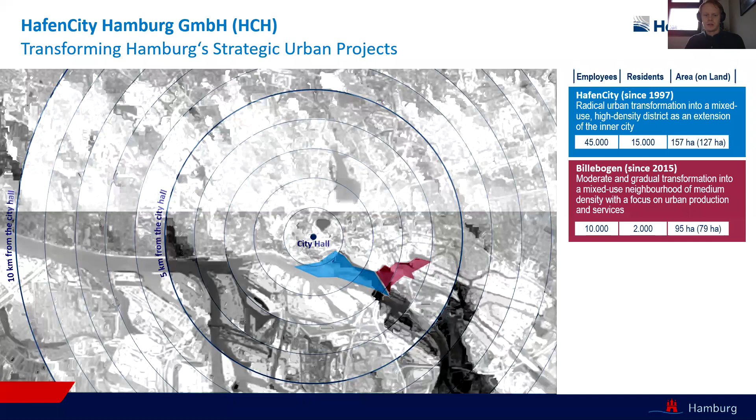Then another area, Billebogen, which is also quite centrally located, but in comparison to HafenCity, it's not a port transformation, it's a regeneration project of an existing commercial light industrial area in Hamburg's east area.

The third project that we manage is Grasbrook. It's, so to say, the southern extension of HafenCity. It's also built on former port land, and it builds on the experiences of HafenCity in terms of urban structure, mobility, infrastructure, and resilience strategies.

The fourth project that we do is the Science City, a project in the northwest of Hamburg, which aims at changing a very much science and research dominated area to a mixed-use quarter that becomes more attractive in terms of a research and residential community.

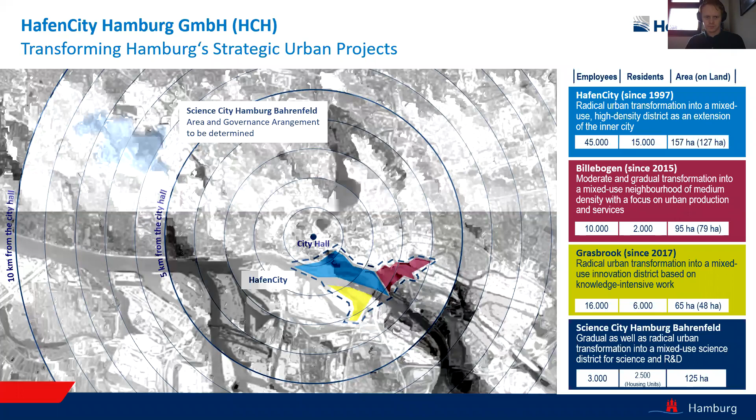Looking at the big challenge of planetary boundaries and climate change, biodiversity, we have tried to look at the timeline of how we can actually reach the climate goals based on a publication of Rockström, a roadmap for rapid decarbonization, which says that there is a phase of no-brainers at the moment, consistent use of existing regulatory instruments, and the need to stop annual growth in CO2 emissions. And it is necessary to actually have an intelligent, disruptive phase in the 2020s.

Cities will take a pioneering role within that transformation, and we have to halve CO2 emissions at least in this time. Then already in the 2030s, so-called breakthroughs, we as city planners, urban designers, landscape designers have to already be able to scale up CO2 neutral or even CO2 negative quarters.

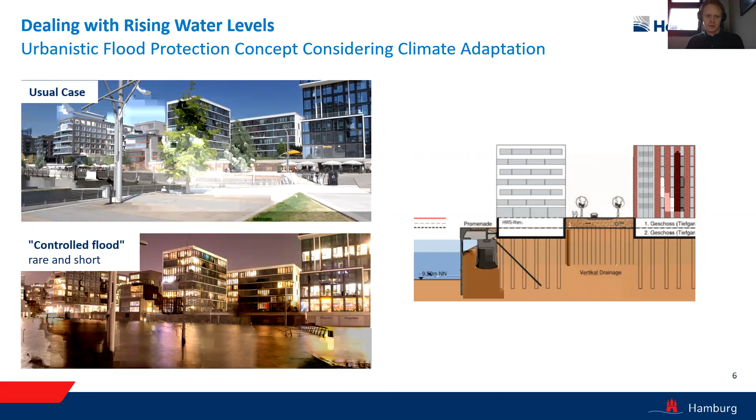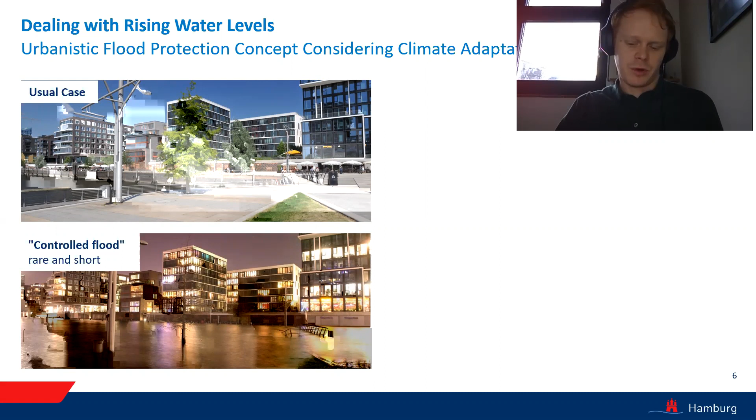This concept has already been realized in HafenCity with a flood secure level of about 8 meters 60, but according to the new projections, we have to reconsider this kind of height now for the new areas. In order to make the new areas safe, we go up to 10 meters with the street level. The photos show you how the system looks in the normal case. If there is no storm surge, which happens about 2 or 3 times a year, then we have this normal case, which is then flooded on the promenade level in the storm surge case.

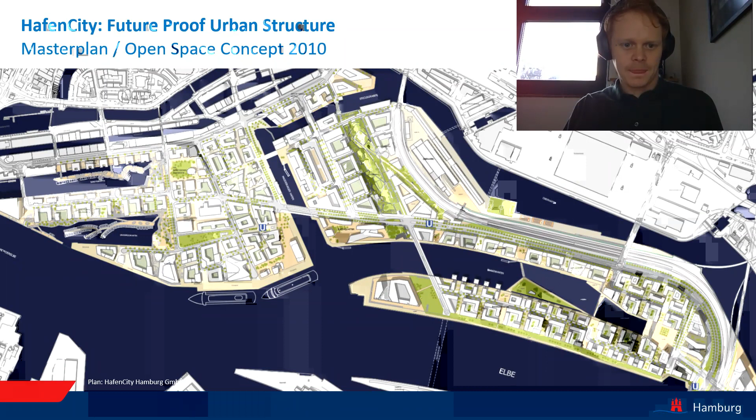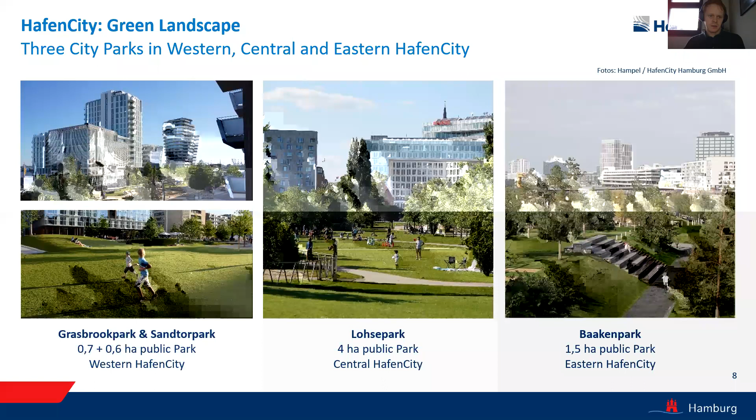Another aspect of the sustainability structure I want to highlight is, of course, green urban infrastructure, as we do not only talk about CO2 emissions and adaptation in terms of flooding. It's very important to create qualitative and multi-purpose green spaces. These are pictures of the 3 main green spaces, the parks in HafenCity, which are used for sports and play, for infiltration and retention of rainwater, and of course for increased biodiversity in terms of animal habitats.

This is an aerial photo of the HafenCity area, showing how it looks at the moment. You have a view from the western side. This is already all finished - it was the first area. Then you have construction sites that are currently underway, still going on at quite a normal pace during the pandemic.

Here we have central HafenCity, and in the back area you could also look at the second picture, which shows eastern HafenCity. We have a park in the middle, and this is also the point I want to make with this photo: parks and green spaces are the ones we realized in the beginning. So you can see the park is already finalized, accessible through the promenade by school kids and other leisure users, but the construction sites are still very much going on around that.

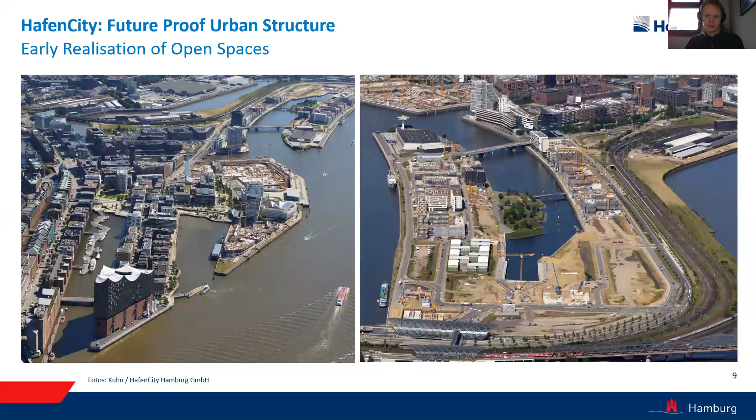So you can see that HafenCity is, in terms of planning, quite through. All the plans in terms of urban design, landscape design, investor competitions, and architectural competitions are already done. It's about finishing and constructing now there.

We did a competition for that area. It's interesting in terms of the sustainability strategy from a governance or process point of view, as it was organized so that landscape design was leveled to the same eye level as urban design. We did not do a tender for urban design where urban designers then brought in landscape designers. Instead, in the first phase, all the urban designers and landscape designers could think about the area completely freely, from their disciplinary perspective.

Then we chose half of the applicants and matched them, so there were offices working together in the second phase that were not really familiar with each other, and already had their own perspective on the area from the beginning. So it was a quite fresh perspective by the planners and architectural offices on this new area.

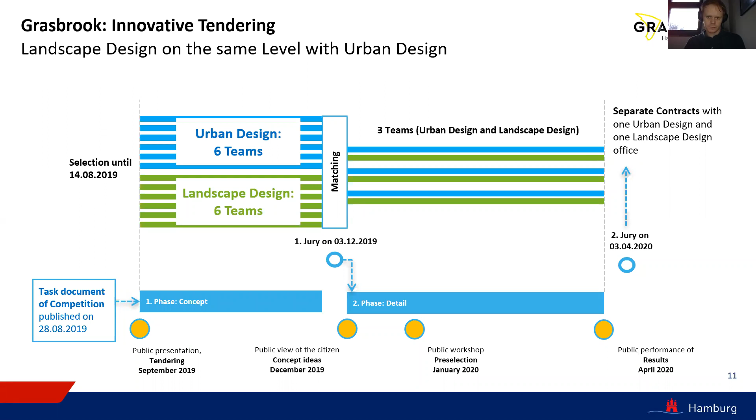We made a decision in April last year, and since then we have had a very intensive planning, functional and landscape planning phase together with the winners, which were Herzog de Meuron for the urban design and Vogt for the landscape design.

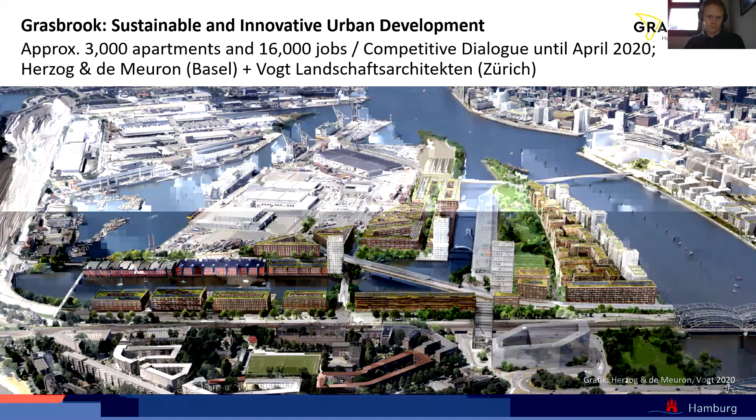So what are the overall aims for this new area, as an advancement and further development of HafenCity? On one hand, we have physical innovations: the city structure, a high inner-city density, horizontal and vertical mix of uses, the green urban structure, and the flood protection system.

We have a mobility system that focuses very much on public transport, car sharing, bikes, and pedestrians. The sustainable mobility aspect is also easier compared to HafenCity, as it does not serve as a transit area for the inner city. We have big streets in HafenCity because many cars are forced to drive through the area, but in Grasbrook we have the chance to make it more car-free. It won't be totally car-free, but it will have a very low modal split in terms of cars.

For infrastructure, we're thinking about a media channel that combines water, energy, and waste infrastructure in an underground channel that is technology-open, making it easier to exchange infrastructures in the future, which gives flexibility for the long-term lifespan of the infrastructure.

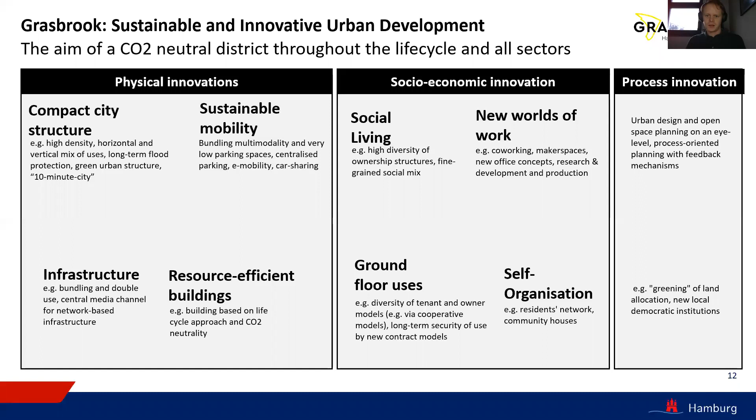And the process innovation, one of them I already mentioned with the design competition, but there's also new ways of thinking of monitoring the sustainability of the area, integrated between buildings and infrastructure. Monitoring often takes place either for buildings or certain fragments of infrastructure, but as the overall goal of the district is CO2 neutrality over the whole life cycle, we want to have a picture of gray energy and operational energy throughout the whole buildings and infrastructure, which is something we work on now in order to also be able to monitor that.

And what is being used to do that, for example, is the BIM technology. Another process innovation is that the competition already produced a district-wide BIM model. So we have building information modeling on a district scale from the very beginning of the development, which we think has a lot of potential in terms of monitoring sustainability aspects, and not only costs or construction details.

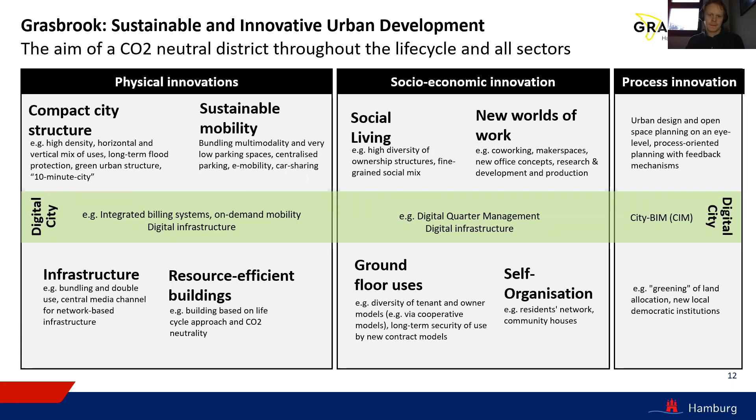What is something that we integrate in the planning process very early is water cycles. So we have the buildings, the green facades, the green roofs, but also the open spaces, the parks, the streets that serve as suppliers of water and also as infiltration and retention potential of rainwater, aimed to be as regenerative as possible, although we are in the middle of the river. So this topic is not so much about flooding, it's more about using as little fresh water as possible for watering the green areas and the green facades.

Another aspect is the mobility system. I already mentioned that we have an extension of the subway, which is quite good to have a central subway station. Interesting for the mobility system is that we plan to accommodate all the parking underground in a central parking garage, and so we can actually save the gray energy for underground parking garages for most of the building areas.

There are so many aspects within a street section related to the underground area, to the building area, and the streets itself. And it's quite challenging to integrate all that sustainability aspects within such a dense area that also works for the number of people who will live there.

So one aspect, for example, is tree placement. We tried to go down to about 6 meters tree distance. I think it was almost double so far by law, because it is related to fire regulations. But if we look at the buildings and how the fire regulations are differently approached, we are able to have more trees in the streets.

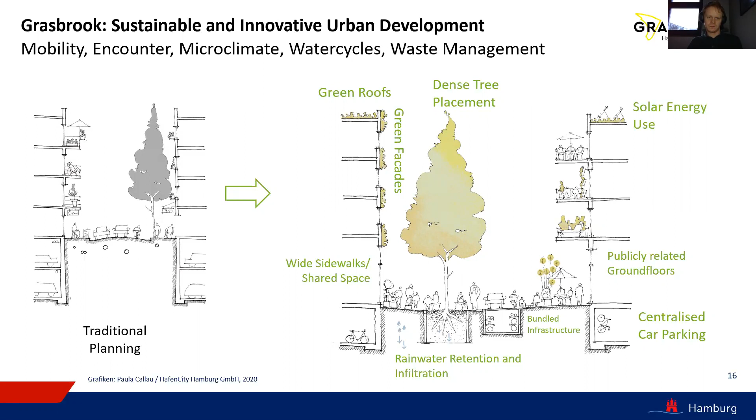I already mentioned City BIM as an important tool, not only for coordination and troubleshooting, but also for the monitoring of integrated sustainability, which is something we explore at the moment. We have the model, but monitoring the sustainability flows in an integrated manner using the model is nothing that we do already. It's something we try to set up now for this new area.

What we have also done throughout the competition, but also now, is to develop new simulation tools for planning in order to have a better evidence-based planning and a more standardized comparison of different topics like water, like noise, like these kind of heat maps that we have for also walkability.

This one shows now the pedestrian flows. We wanted a standardized and comparable simulation tool to plan open spaces and also infrastructure and buildings better in the future. This is a tool that we developed along the process, so we did not already apply it. We tried to develop it together with academic partners.

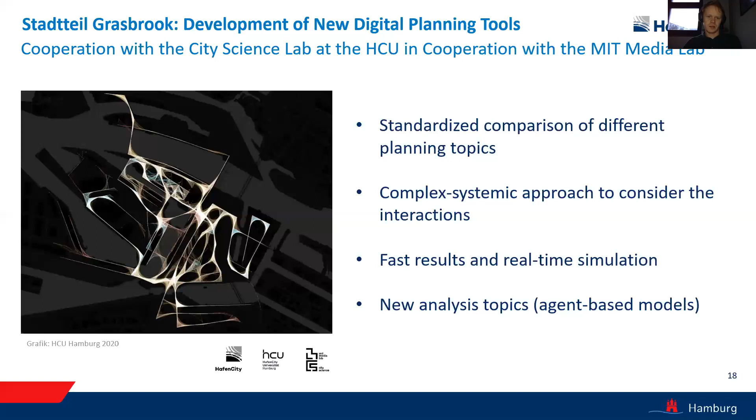On the building scale, the state of the art already in HafenCity is to look at the full life cycle of buildings. The focus on the operation and use phase of buildings has been so big in the last decades and has made it possible to decrease this energy use very much. Now the focus goes more into the planning and implementation phase, where we have almost or more than 50% of the whole total CO2 emissions of a building.

And we want to bring that down through recycling materials. We also talk to steel producers, we talk to recycling concrete producers, and then match them with the building, the project developers and the architects. So we as an urban development company also see ourselves as someone who matches different engineering approaches and sustainability strategies between different actors, in order to have lower gray energy, a negative balance for the use phase, and then have a net zero emission building after the life cycle.

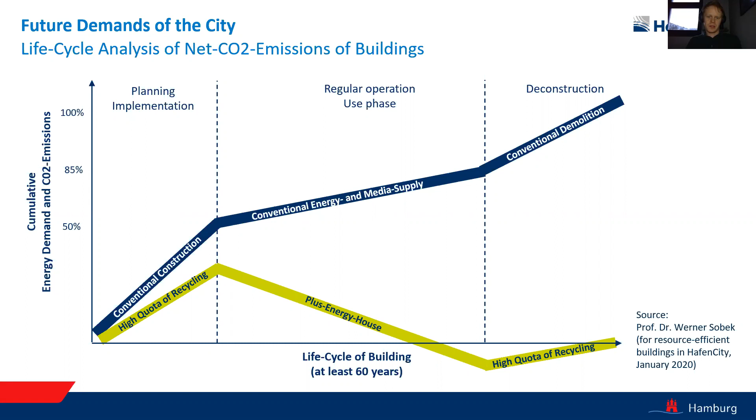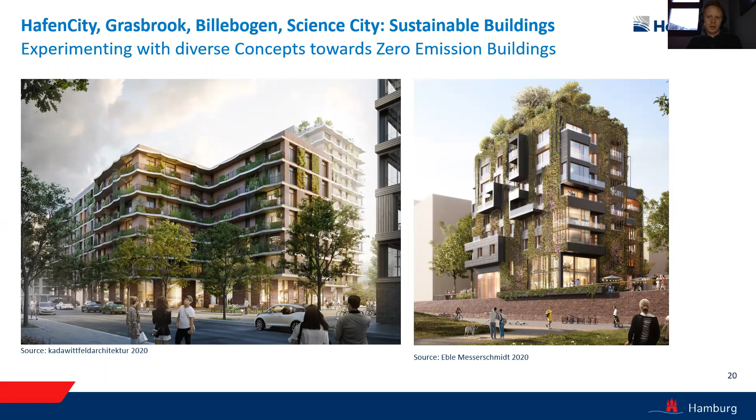And we do this already. I go back now with the area to HafenCity. So these are current projects in HafenCity, Moringa, for example, that is under construction. You can see that this is the move that we are doing already in HafenCity, in the last buildings there, and will also be the direction for Grasbrook. And those kind of buildings are not only high cost housing, high price housing, they are always mixed use, based on a quite socially mixed and land use mixed concept.

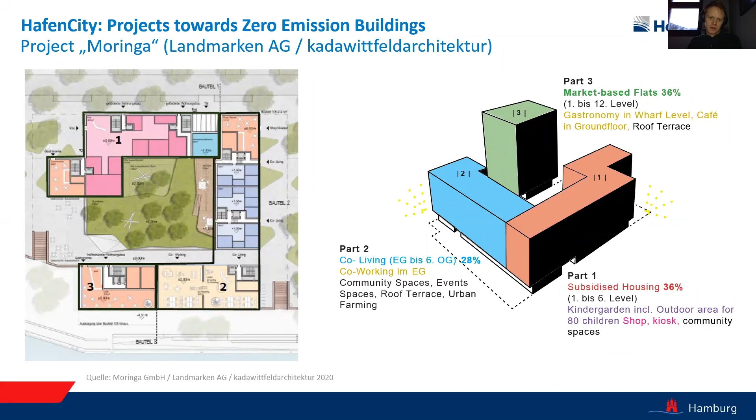So in this example, we have subsidized housing, 36%, we have co-living, co-working, and then market-based, free market price flats. And this kind of mixed-use concept also makes it possible to have a green facade to improve the microclimate drastically within this project, and decrease the temperature, improve the cooling, improve biodiversity, improve the local air quality as a building scale approach that is embedded in the district scale approaches that I mentioned before for the Grasbrook project.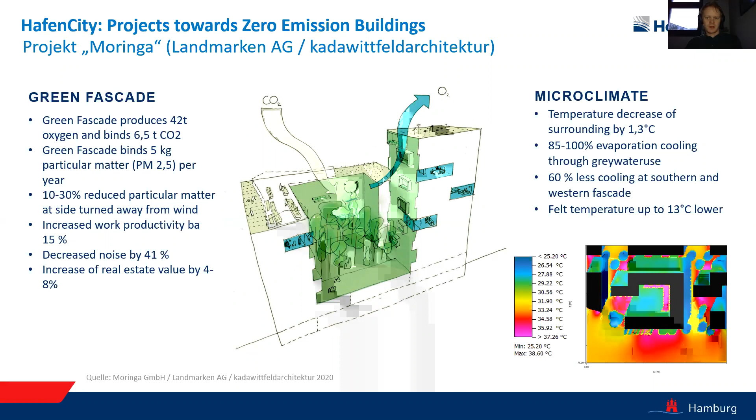One key instrument for that is our eco-label, since 2007, which is mandatory for all since 2017. And the base of the experiences that we make with projects like this are then being transformed into a standard through the eco-label.

One might ask why we do have our own eco-label. It is actually already quite harmonized with the DGNB certificate. But one reason back then was that there was no German eco-label, so HafenCity just implemented its own. And another reason is that there are many aspects where it makes sense to actually incorporate site-specific factors, like the energy infrastructure, CO2 coefficient, as a trade-off of heat insulation, for example, which can be easier and more agile with our own eco-label.

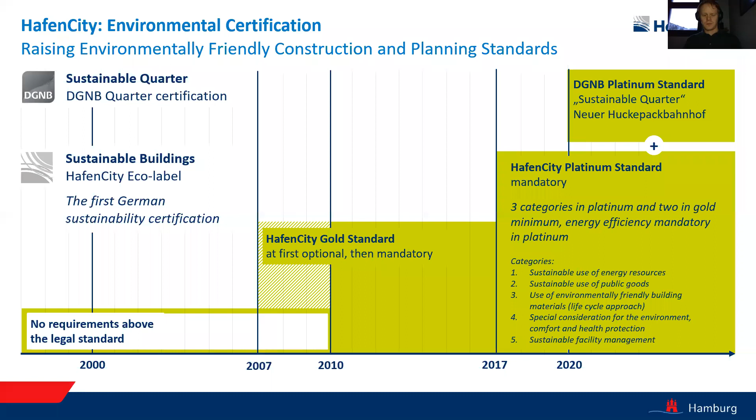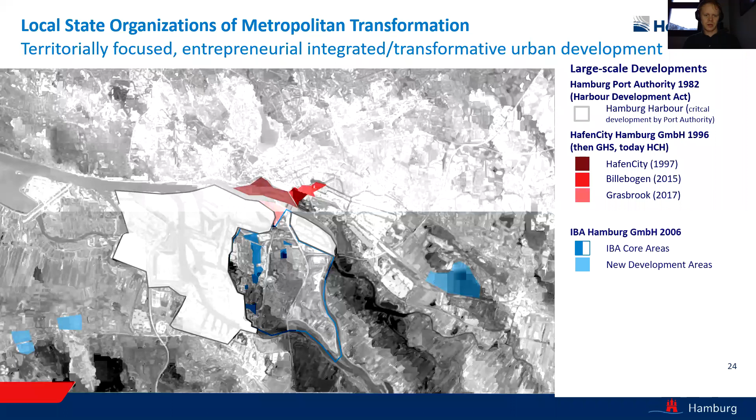Managing these kind of areas through a city-owned agency is something that has become quite popular. We are in Hamburg, and we are not the only agency of such a kind; there is also IBA Hamburg that manages these blue areas. And then there are other instruments like innovation districts and special coordination zones.

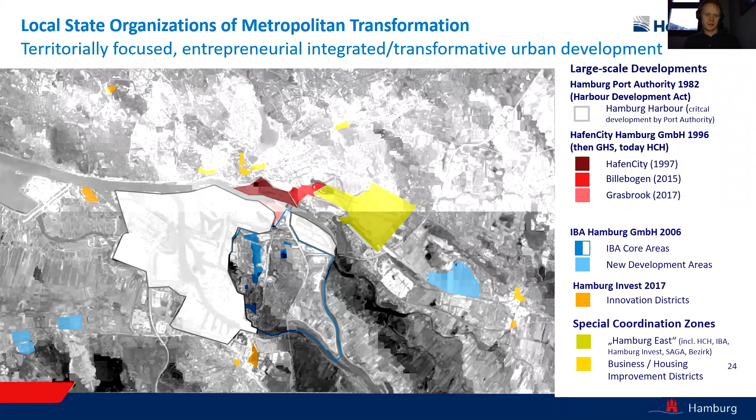The main aim for this territorially focused and entrepreneurial integrated urban development is to have a long-term perspective that is integrated in terms of interdisciplinary work, but also economically and financially, as we are widely independent from tax money. It is the land value we operate with, so we have a realized financial income, which is the income we generate through land sales to private investors. This realized financial income we directly reinvest into public infrastructure in the same area.

There is also a big part, especially interesting for the sustainability strategy, namely a non-realized financial income. This means from the potential land value that we could actually generate in that well-located inner city land, we do not realize all of it. We sell the land not for the maximum price, but actually for a lower price.